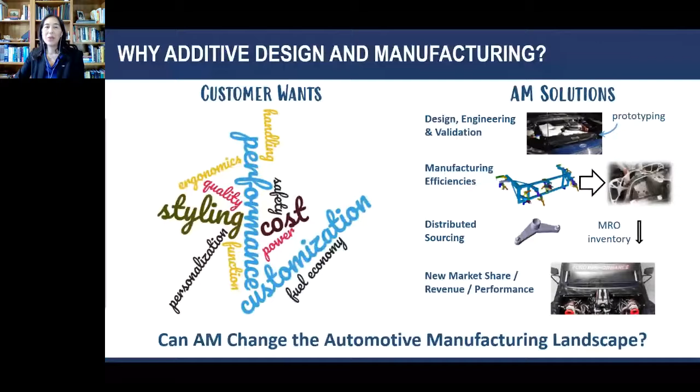So just some history of additive manufacturing at Ford in a timeline. Ford had found early on that additive manufacturing could completely change the way that we do our new product design process through those rapid prototypes, starting in the late 80s with the earliest additive manufacturing technology, stereolithography. Soon after, because of the game-changing way that this helped us in our design, we developed and opened an additive manufacturing training and development center, and then quickly developed several local centers to support all of the needs for rapid prototypes across the globe. Then in 2004, a significant shift in engine prototyping resulted from the introduction of sand printing or rapid sand casting. And so that further reduced our design time for new engine designs.

And then more recently, in 2014, I launched a dedicated program in our research organization that allowed us to start to advance additive manufacturing technologies beyond just prototyping. And from there on, we started to have more engagement with early access opportunities to emerging technology providers. And we focused especially on additive manufacturing for production applications. More recently, in 2017, we added laser powder bed fusion metal printing to our in-house capabilities. And in 2018, we introduced our first production applications, which I'll talk a little bit more about in a second.

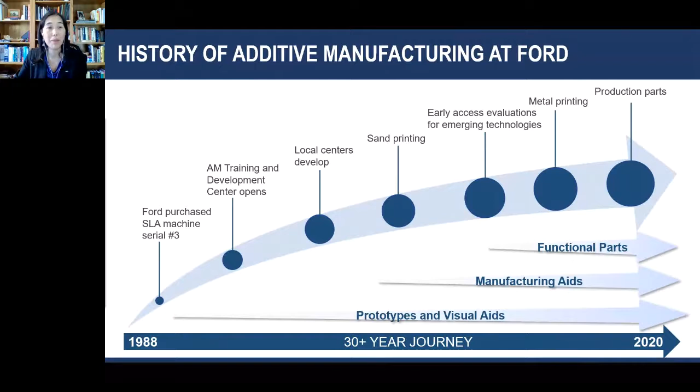In research, we have facilities in both Dearborn and in Aachen, Germany, that focus on more fundamental development of additive manufacturing technologies, including materials, processes, simulation, and design. And then in our product development organization, our additive manufacturing teams focus on how to design those products for additive manufacturing processes and then implement them into our use cases.

So a couple of additive solutions that we've seen across the company. We've shown significant value using additive solutions for manufacturing fixtures, like the one shown here, as well as for hand tools, lift assists, and end effectors on the factory floor. And in fact, we have over 45 printers at more than 30 of our manufacturing plants that support these types of activities. So additive is a solution that can simultaneously address how to make these complex and heavy manufacturing aids to reduce their weight, to reduce the cost and the lead time.

But the number of parts that we need to produce, the number of fixtures and manufacturing aids and tools, is extremely low volume, 1 or 2, but their physical size can be quite large. So these point to a solution of material extrusion with functional materials, including carbon fiber composites.

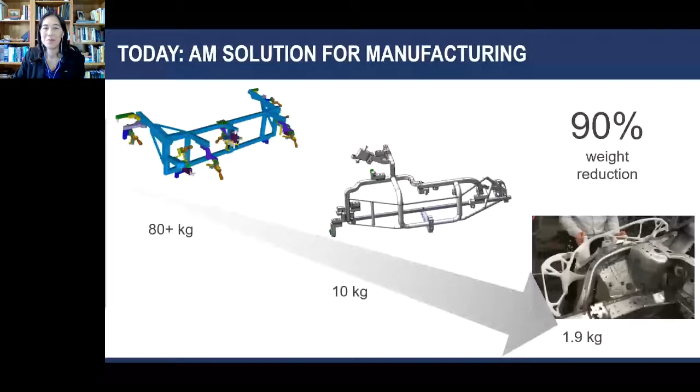As we move up in volume from 1 or 2, we now can justify the business case to address more niche market opportunities that were not possible with conventional manufacturing that used a tooled solution. So in this example, for our F-150 Raptor in China, there was a need for a different component due to some of the regulations that were different from our North American base model. But because of the low volumes in the China market, in the low thousands, cutting a special tool didn't meet our economic targets.

And so we turned to additive manufacturing as a solution, here using Carbon's digital light synthesis and EPX82 to quickly design and produce the part that you see here. And if you can see my video as well, I do have a part, so you can imagine the size and some of the details of that part. So in this auxiliary plug, as I mentioned, we were able to quickly iterate through several designs to make sure that we hit the functional performance that we needed for the application.

But not only were we able to meet our low volume cost targets, we were also able to include this customized aesthetic with a logo and the texture printed directly onto the part. So if you can see this, the challenge was really to ensure good repeatable feature detail for this appearance application, as well as ensuring that it has durability to UV exposure, heat, and humidity in the vehicle interior environment.

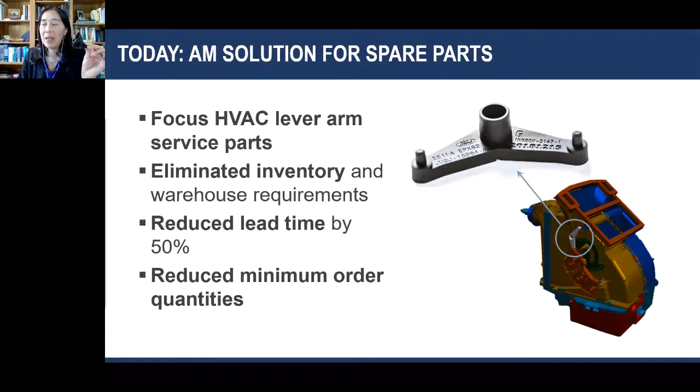Our original design for the base model had a left-handed and a right-handed part. And in going to additive manufacturing, in addition to a moderate BOM consolidation of 3 parts to 1 part, we're also able to convert it to a single design that can be used either on the left-hand side or the right-hand side, driver or passenger side of the vehicle. So the big challenges here that we had to overcome for using additive manufacturing included the validation of the material, the functional requirements, and the manufacturing requirements.

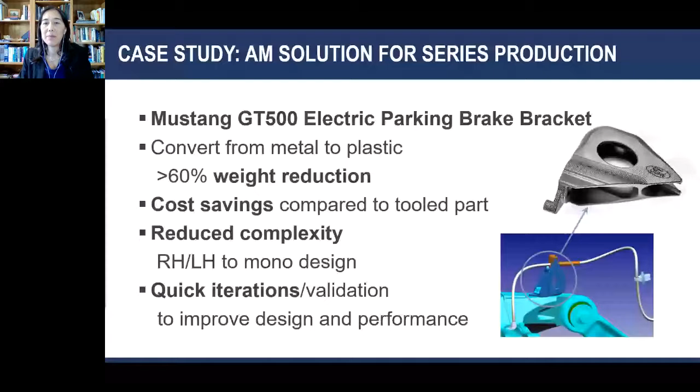The first step was material validation. So several candidate materials and technologies were screened and benchmarked against conventional manufacturing before ultimately selecting Carbon's EPX82, epoxy-based resin, using digital light synthesis. This bracket is an exterior application, underbody, but the other applications that we saw previously also use the same material. We shared the material validation.

So we ended up doing a full suite of interior and exterior testing, including weathering, fogging, odor, flammability, as well as exterior underbody, fluid and chemical resistance, and heat and humidity aging. So you see here a huge number of tests to understand whether from a material point of view, we could survive durability in harsh environments for automotive applications. So once we passed the material and performance testing on this material, we moved to functional validation.

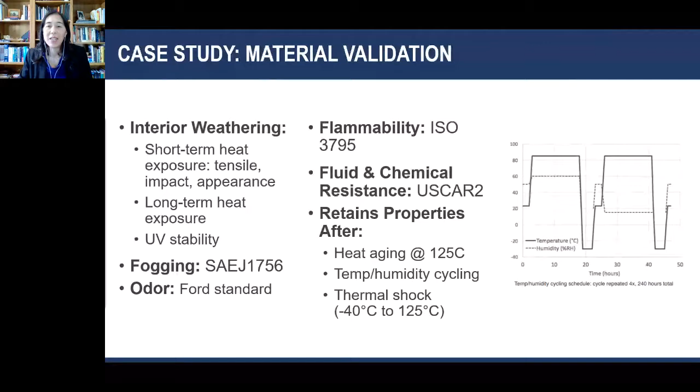And interestingly, we saw significant advantages in the functional testing stage using additive manufacturing. If you think about it, the first parts that you test are not necessarily prototype parts. They are the first production parts because they're using the production intent or the production process and materials.

But we're still able to go through design iterations during that process. So in one example, one of the designs failed during vehicle level track testing. We're able to remove the part, quickly analyze the failure mode, redesign the part to address the failure mode, print the part and reassemble it back onto the track car by the next day and continue the testing, something that could not be done in a conventionally manufactured part.

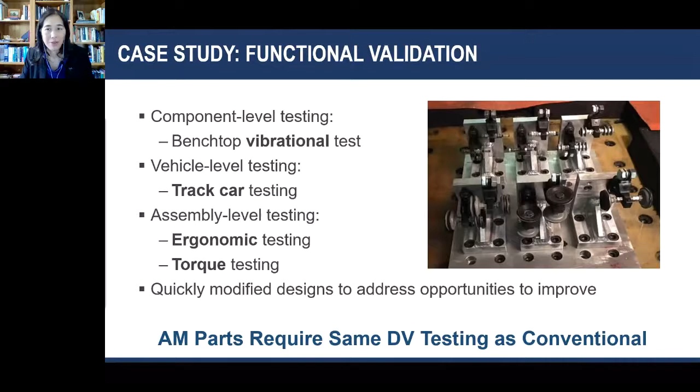And then finally was the manufacturing validation step to ensure that not only were we able to have a design that met the functional requirements, but we also had a design that was manufacturable and that we're also able to maintain our quality standards in that manufacturing process. In doing so, we went through our typical processes, including creating DFMEAs and PFMEAs, and followed our standard PPAP process in the automotive industry.

Again, additive manufacturing resulted in a couple of benefits that we didn't think about from the beginning. So for example, instead of a physical tool that we typically have in stamping or injection molding, here the CAD or the STL becomes our digital tool. However, we are now able to individually serialize and label the parts to indicate the printer, the project, the batch, and even the position on the platform for that particular part. So now as parts are assembled onto the vehicles, we have a way to track their provenance as they go through the assembly process and then through the use case to our customers and finally to the end of life.

Furthermore, the digital thread lets us put even more security into the entire digital chain to ensure that the right materials, the right files, process parameters, and so forth are used, and then that the parts are assembled correctly onto the right vehicles. Still in development, and we're actively doing so today, but I can't share anything today with you, is linking the physical and the digital twins together to be able to confirm genuine parts and prevent counterfeiting.

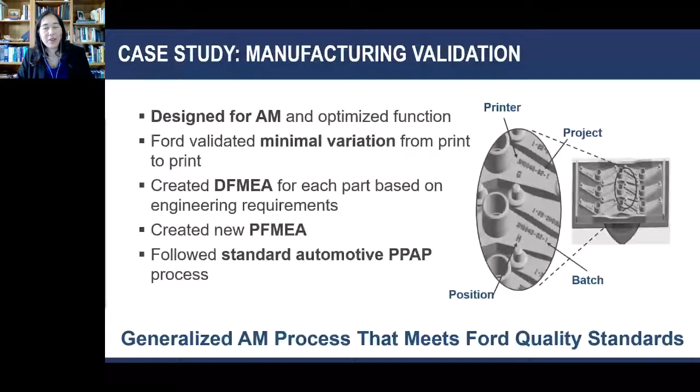So we've seen some early examples of additive manufacturing providing value, but to date, these have been limited to low volumes. So just a note, in the automotive industry, when we talk about low volume, anything that's lower than 100,000, for example, we would consider low volume. So low volume has a huge range. We have vehicles for motorsports, for example, that have a volume of 1, all the way up to just under 100,000 that we consider low volume.

Compared to the aerospace industry, the scale is much lower, but we have other similarities. The range of size of parts, the different types of requirements for each of those parts is quite similar. But another big challenge for us is our cost sensitivity. This is something that we're really quite sensitive to because of the scale and because of the value to our customers. Further, we have specific needs to be flexible in our manufacturing processes, not only to integrate with our conventional manufacturing processes and infrastructure, but also to have built-in quality in these conventional and new manufacturing processes because of the way our supply chain works.

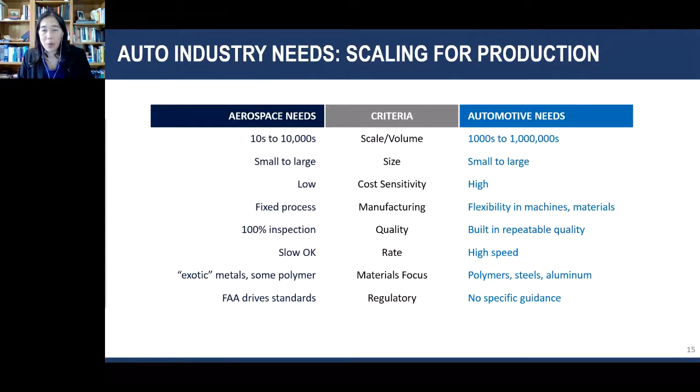But it's not just faster and more efficient processes that will get us there. I talked a little bit about the other challenges that we have as well. But it requires the development of these automotive grade materials that meet our functional requirements. It requires the development of automotive standards that allow us to certify and validate quality and performance in a systematic way, to have that built-in quality as opposed to 100% inspection.

It requires us to develop and make use of software tools that allow us to design, simulate, build, monitor, and distribute inside our manufacturing environment. And it requires more end-to-end automation to remove the variability and to eventually allow us to move to lights-out manufacturing that will be important for scalability. All of these together are necessary components to deliver the quality and the throughput that we need to meet automotive scale.

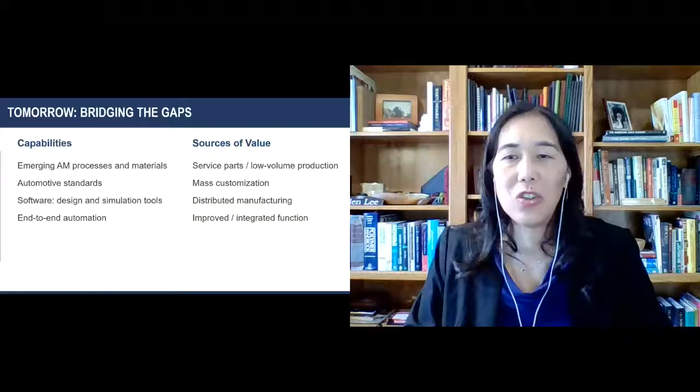But with these, we can adopt more of the new sources of value that I touched on previously for things like service parts and low volume production, for mass customization and distributed manufacturing, and finally for scaling to really gain the value of improved and integrated function. So just wanted to end with the other most important thing, which is for us to really embrace the paradigm shift, to think additively.

This is such a big challenge that Melissa ended hers with a quote. And this is one that I come back to over and over again with things that are so tough like additive manufacturing, is that we need to take the steps forward and take the small successes when we can, because we understand that the ultimate goal is a big challenge. So to paraphrase Voltaire, don't let perfect be the enemy of the good. Let us take the good at each step.